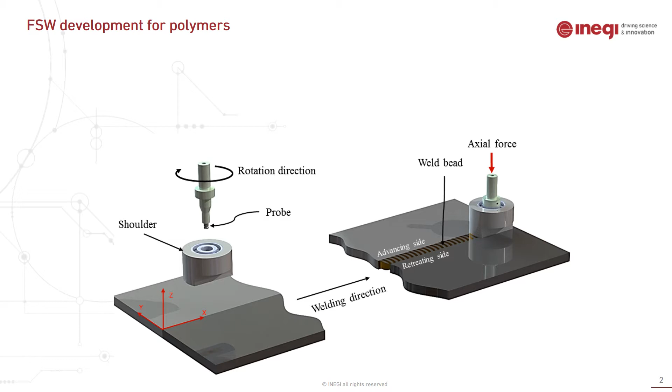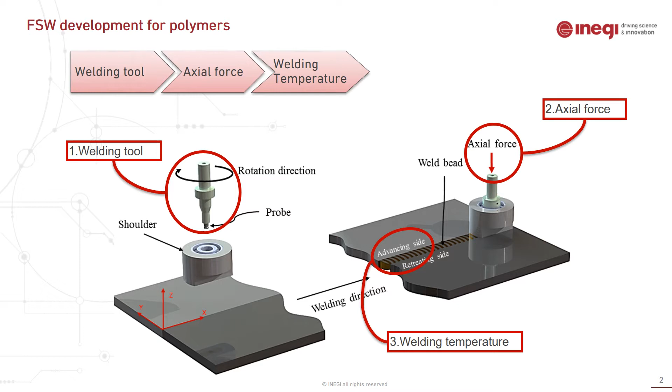Hello everyone, my name is Shayan Islami and I'm presenting with the title of New Technological Solution for Friction Stir Welding of Composites. Friction stir welding is based on frictional heat between the rotating tool and the base material under an axial force. The welding tool plays the most important role in this process, followed by axial force and welding temperature, which is a result of axial force, welding tool and the welding parameters, and after all this process can be optimized.

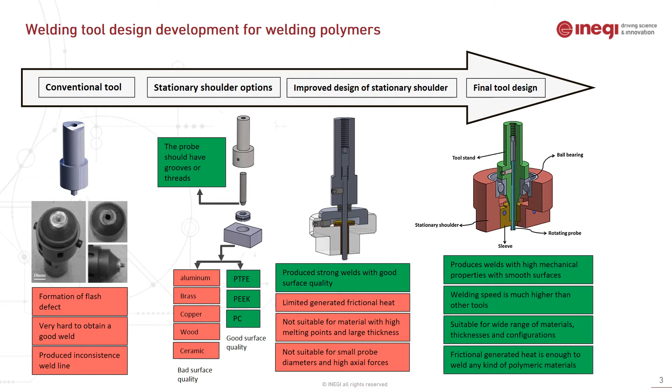This slide shows welding tool design development for welding polymeric material, which I studied during my PhD, starting from conventional welding tool to a stationary shoulder till the final tool design. Different geometries and materials were tested. This is the final tool design for welding polymeric material. The tool is made of a stationary shoulder out of PEEK with a large copper sleeve equipped with a thermocouple shaft to monitor welding temperature. This tool could obtain welds up to 97% of parent material tensile strength.

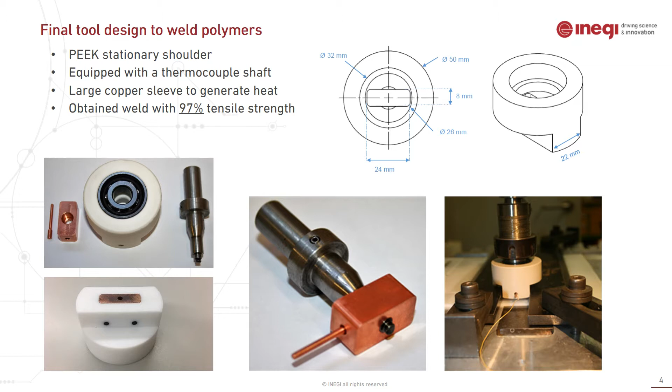However, in order to study the behavior of composite material during friction stir welding, three different tool designs were tested for joining thermoplastic composite in the butt joint configuration. The first tool is a normal conventional tool that is used for welding metallic material. The second is the PEEK stationary shoulder, which we developed for welding polymeric material, and the third is called hybrid tool, which is a combination of a stationary and rotating tool.

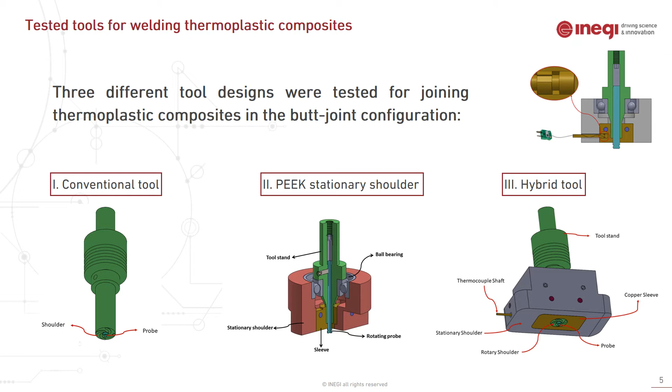For this study, polyamide 6 reinforced with 30% short glass fibers was chosen to weld in a butt joint configuration, and we studied different tool design geometries and their effects on the weld quality. The weld direction was perpendicular to the fiber direction, as you can see in the picture. On the right top picture you can see the final setup for welding, and on the bottom the specimen geometry for mechanical characterization.

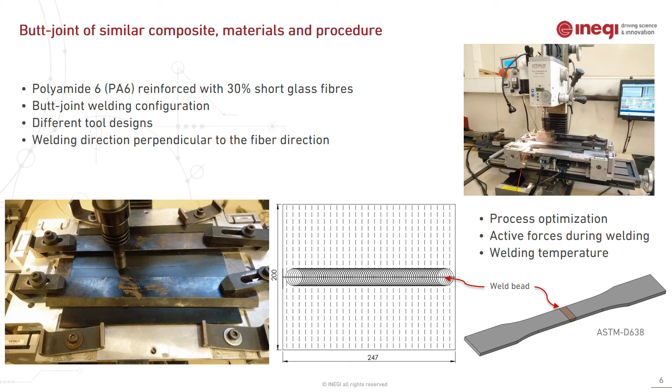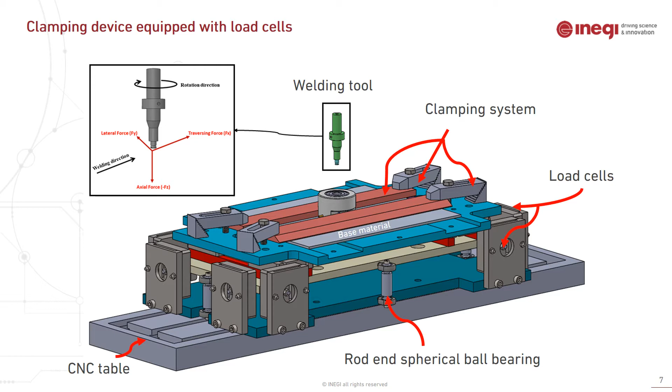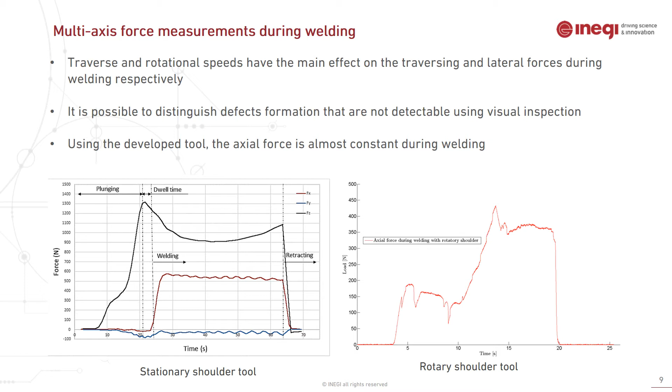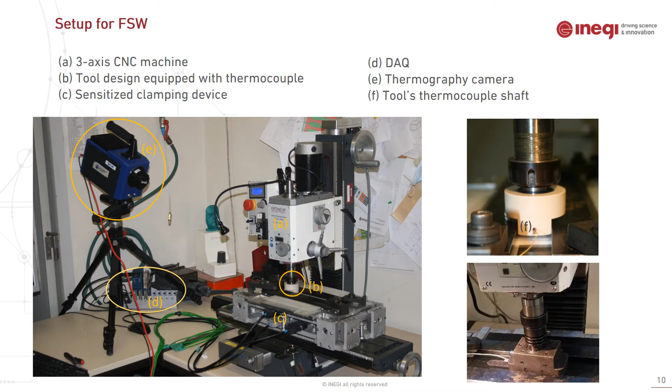Also, using the developed tool, which is a stationary tool, the axial force is almost constant during the welding. As you can see here, the difference between the stationary shoulder tool and rotary shoulder regarding the axial force. This is the final setup for FSW. At A you can see the 3-axis CNC machine, B tool design, C the clamping device, sensitized clamping device and data acquisition system. At E thermographic camera, F and tool thermocouple shaft for recording the welding temperature.

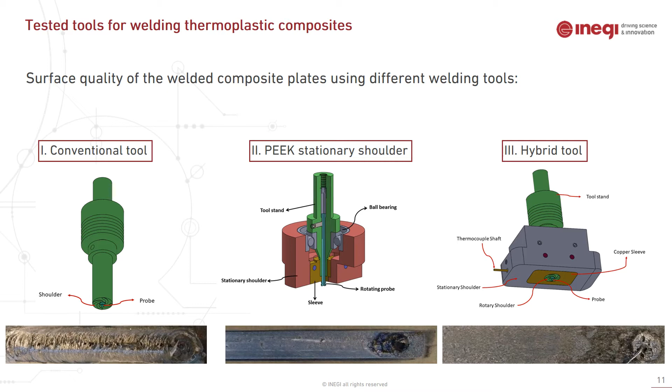This slide shows the surface quality of the welded plates using the three different tool concepts. As you can see, the conventional tool had a very rough surface quality compared to the PEEK stationary shoulder. The PIC stationary shoulder had the smoothest surface, and for the hybrid tool the surface was rough, but not as rough as the conventional tool.

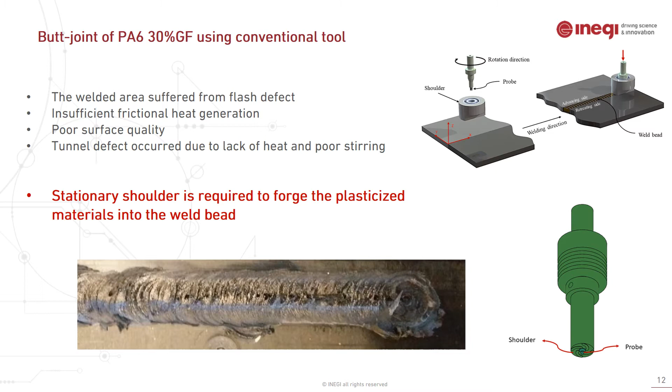The conventional tool created poor surface quality, also the tunnel defect in the middle of the weld. In general, it was concluded that the conventional tool, which is a rotating shoulder, is not suitable for welding composites as well as polymers due to the flash defects and bad surface quality on the weld area. So a stationary shoulder is required to forge the plasticized material into the weld.

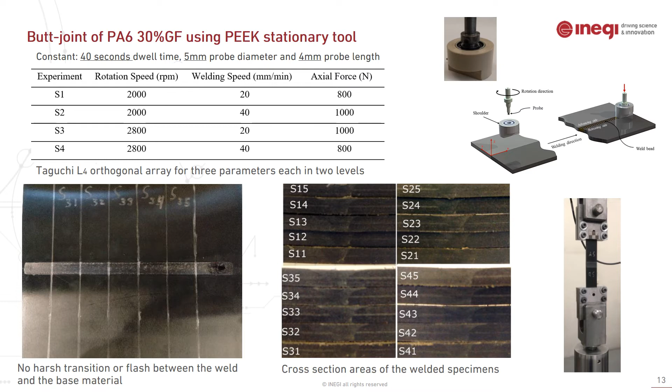The next tool that was tested was the PEEK stationary shoulder that was developed for welding polymeric material. The Taguchi table was conducted for the optimization process for 3 parameters, each in 2 levels: rotational speed, welding speed, and axial force. 5 specimens were produced for each combination and were tested to study the effect of the welding parameters on the joint strengths.

Ultimate tensile strength of the welded specimens is shown in this table. As you can see, the best weld achieved maximum rotational speed, also maximum welding speed. However, the welding speed has higher contribution regarding the influence on the weld strength, followed by rotational speed and axial force.

However, you have to keep in mind that all the welding parameters are related to the specific tool design. Also, the welding temperature is shown, and it's clear that the strength of the produced welds increases as the tool is advancing due to the increase of the welding temperature. Low thermal conductivity of the PEEK preserves its generated heat inside the copper sleeve. Also, as you can see in the picture on the right bottom, the PEEK stationary shoulder creates a smooth surface by forging material inside the stir zone. However, with this tool design, maximum joint efficiency of 43% was achieved when compared to the base material.

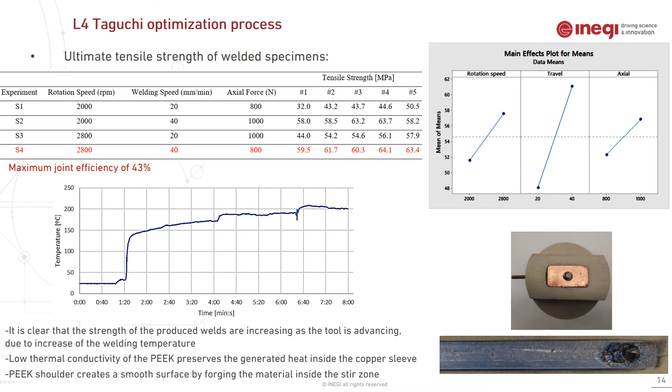In this slide, the comparison between the parent material and welded specimen is shown. As you can see on the left, the tensile strength of the parent material in both directions, parallel to the fiber direction and perpendicular to the fiber direction.

The maximum joint efficiency of 43% was obtained for the S4 specimen, and welding speed with 57% contribution had the highest contribution, followed by rotational speed at 12% and axial force.

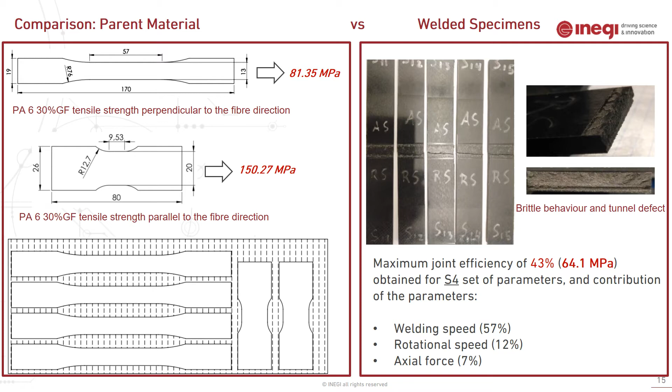An innovative welding tool was developed and tested. This tool is a combination of a rotating shoulder with a stationary shoulder. The purpose was to compensate for lack of frictional heat when using a stationary shoulder, because the rotating shoulder has the main effect on generating frictional heat, and with the absence of a rotating shoulder, the welding tool suffers from lack of heat generation.

The stationary shoulder would forge the plasticized material inside the weld bead, and the probe would stir the plasticized material under an axial force. However, due to the size of the H13 welding tool and capacity of the available machine, it takes time just for the tool to heat up to the desired temperature during the dwelling stage.

So in some cases, additional heat source was needed. Also, this tool demands high torque as the contact area between the tool stand and copper sleeve were increased significantly in order to compensate for lack of generated heat compared to the PEEK tool. The welding parameter range that could be tested with this tool and available machine was very narrow, as the spindle was unable to apply enough torque.

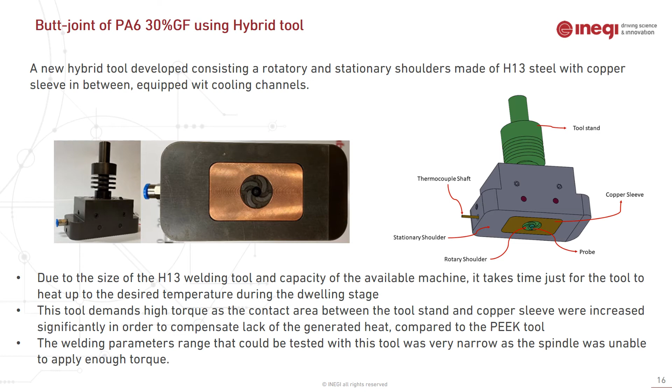The surface quality was poor compared to the PEEK stationary shoulder, but this can be solved by coating the stationary shoulder.

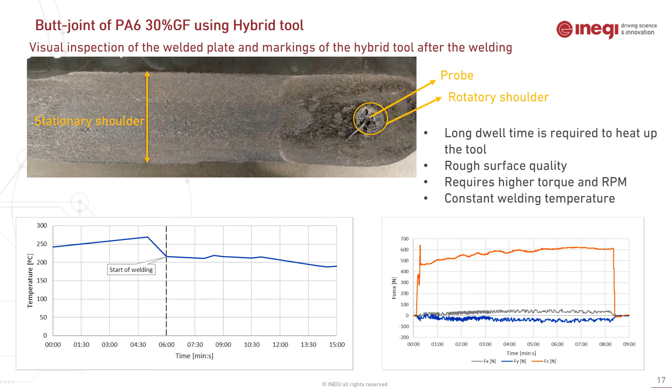Despite the fact that the surface quality was poor compared to the PEEK tool, the strength of the welded specimen was higher.

As I mentioned before, the range of parameters that could be tested using the available tool and machine was narrow. However, we could manage to use those parameters for testing and welding the plates, but we preheated the tool up to 200 degrees instead of dwelling for a long time. Also kept axial force at 600 Newton, RPM 2000, and welding speed of 20 millimeter per minute.

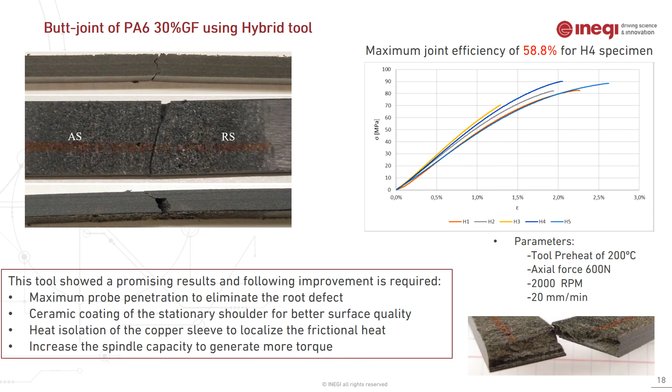Parallel to friction stir welding and the development I mentioned, we are developing and patenting a new joining process, which is a combination of friction stir spot welding and riveting process. With this concept, a rotating tool will hold a consumable filler material, which could be the same or different than the base material.

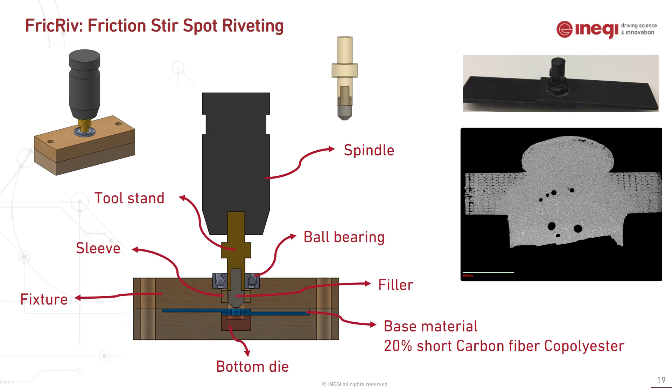This was 20% short carbon fiber, and it was 3D printed. As you can see, since printing is a defective process, you can see all the layers of the printing, and in the middle of the joining area, the filler enhances the mechanical properties of the material. This method can be used for joining polymers and thermoplastic based materials.

For the conclusion, the welding tool is the most important factor affecting weld quality and appearance. It was concluded that conventional tool is not suitable for welding thermoplastic based composite, and use of high performing thermoplastic for a stationary shoulder such as PEEK or PAI creates sound surface quality.

After the tool design, rotational speed and welding speed have the main effect on weld quality. Axial force is responsible for forging pressure and heat generation, and the developed device enabled use of axial force as a welding parameter even using position control welding.

The welding speed and rotational speed have the main effect on the traversing and lateral forces. The developed sensorized clamping device can be used for health monitoring of the welding process. Also, the applied force is kept constant during the operation using a stationary shoulder tool.